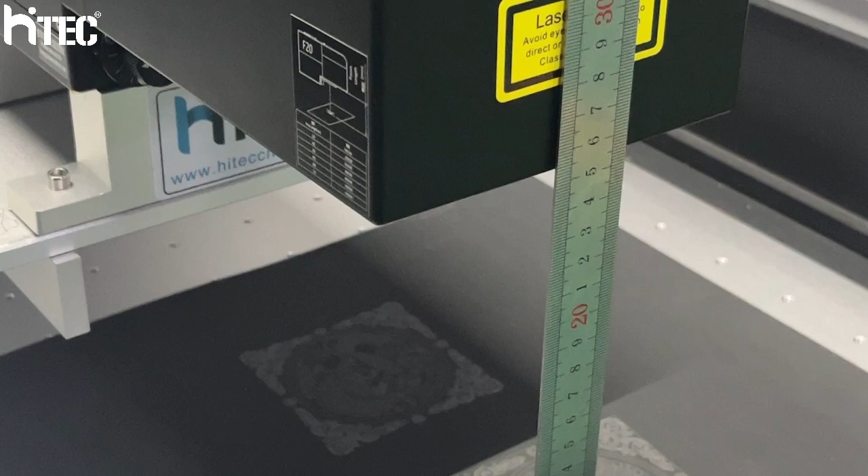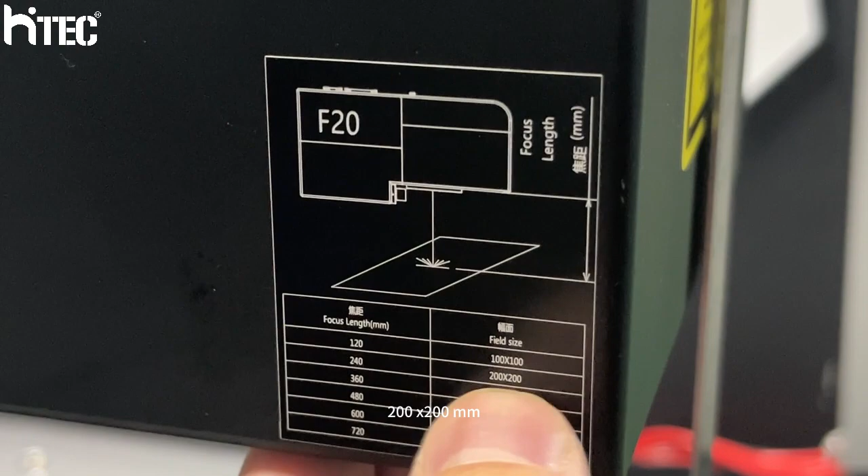When you change field size from 100 and 100 millimeter to 200 and 200 millimeter, see here. This is field size 100 and 100 millimeter, the focus length is 120 millimeter. For 200 and 200 millimeter, the focus length is 240 millimeter.

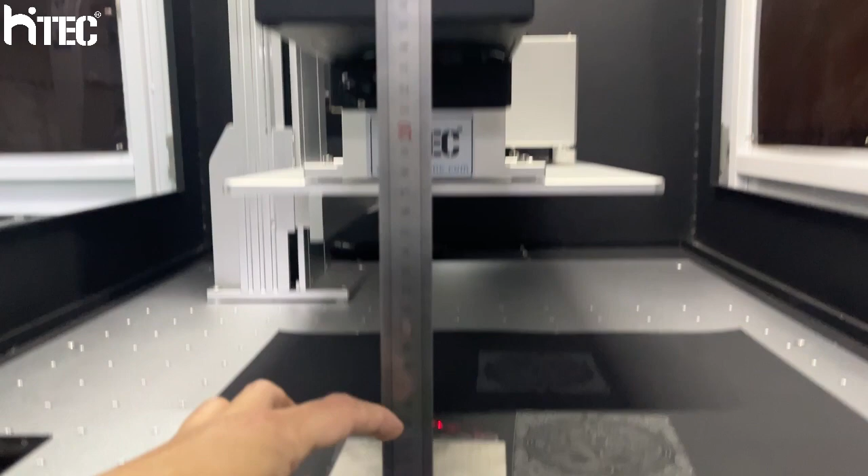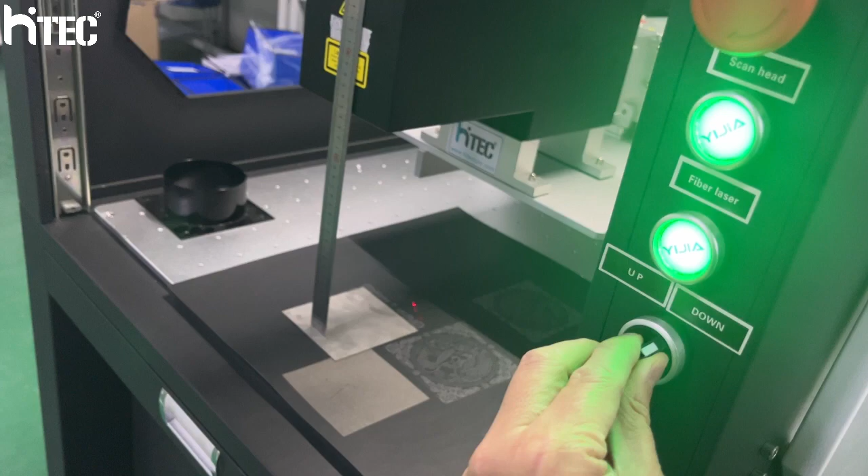So first we need to adjust this size from here to the material surface. You need to make sure it's 240 millimeter, so we need to move down. Check here, make sure it's 240 millimeter.

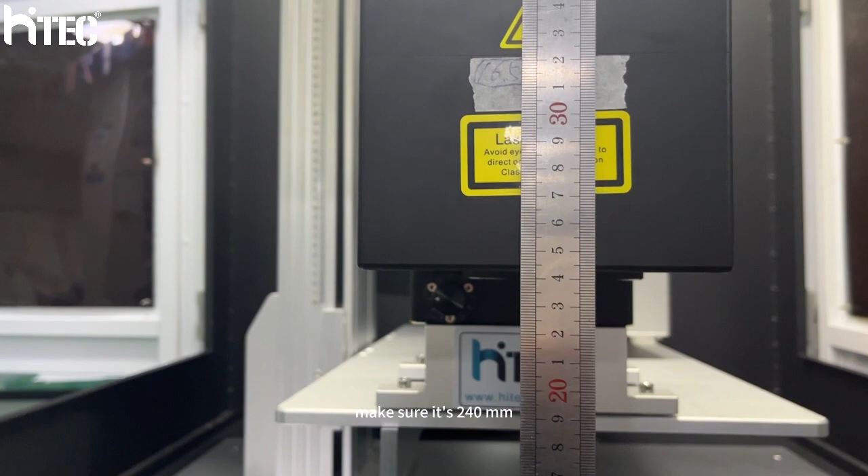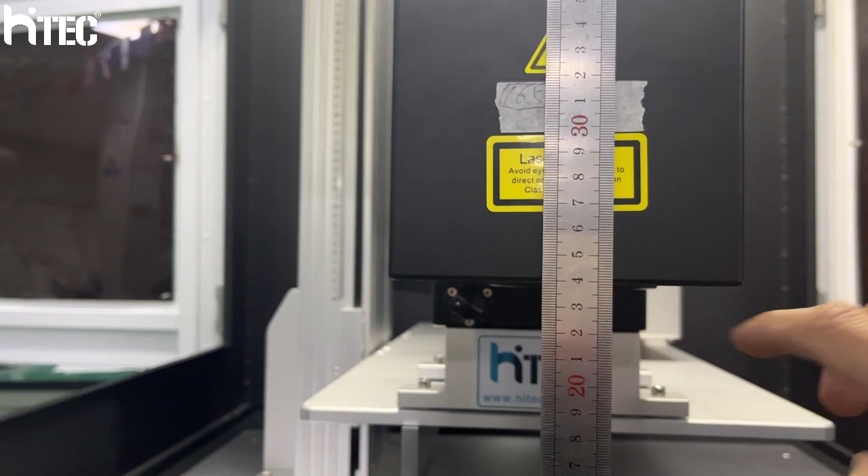Okay, here need to be very precise. And then change from software, make a design.

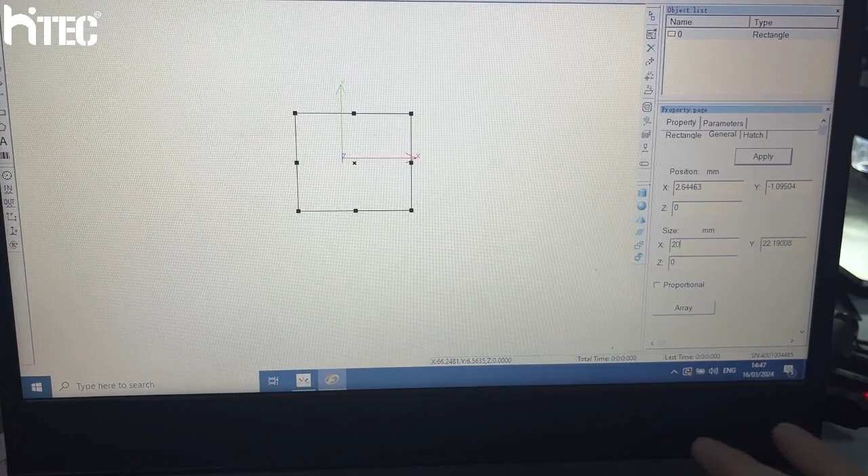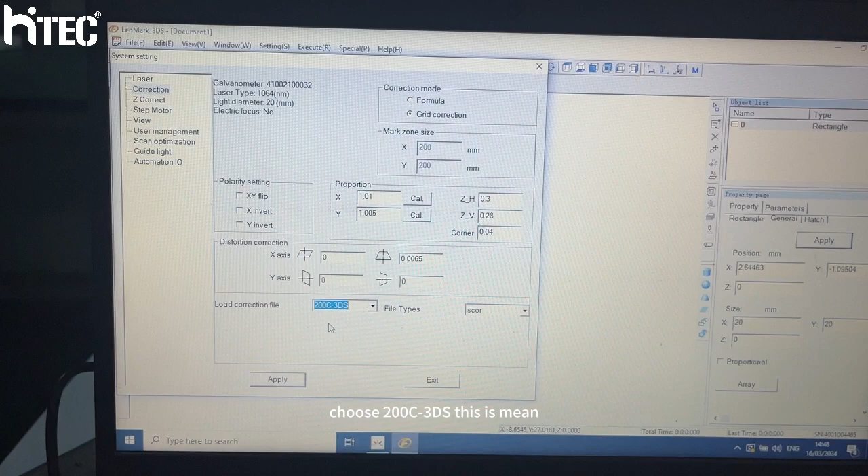Apply. Here, setting, system setting, correction. Here choose 200 - this means field size is 200 and 200 millimeter. Apply. Okay.

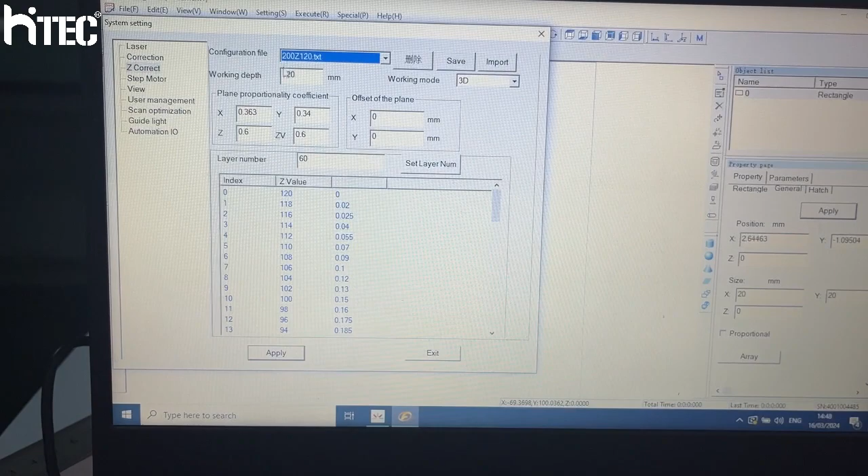And see here, choose this one, you can see working depth is 120 millimeter.

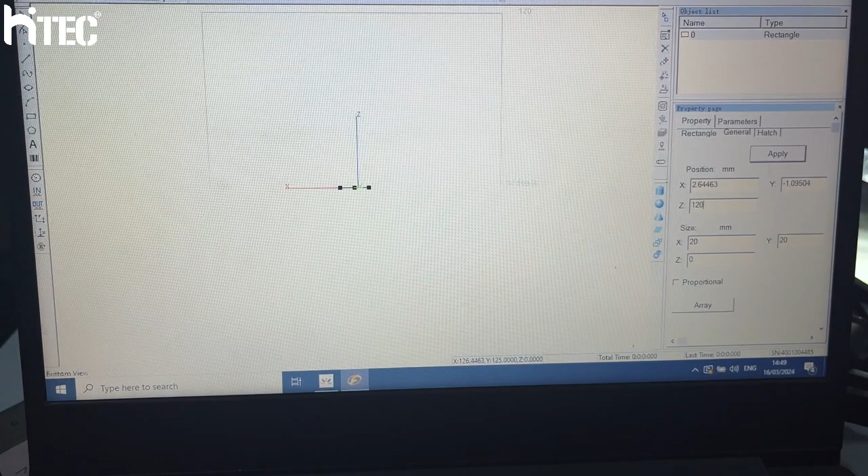So here need to set 120 millimeter. You can see this will move up to here. That's okay, here.

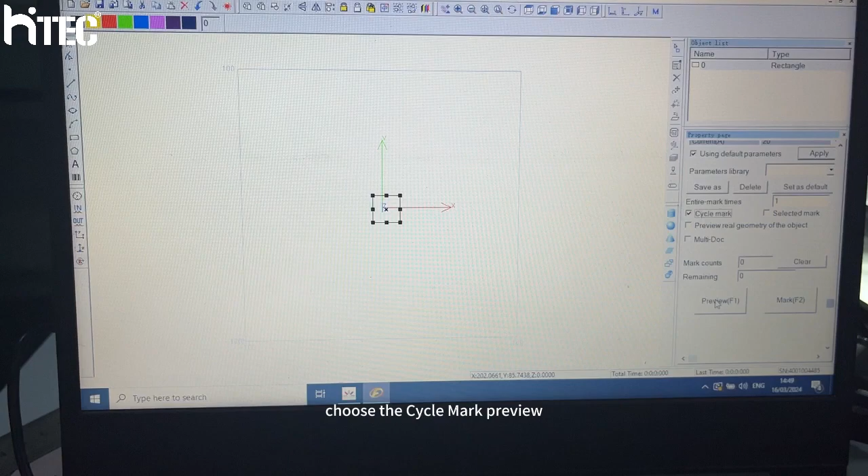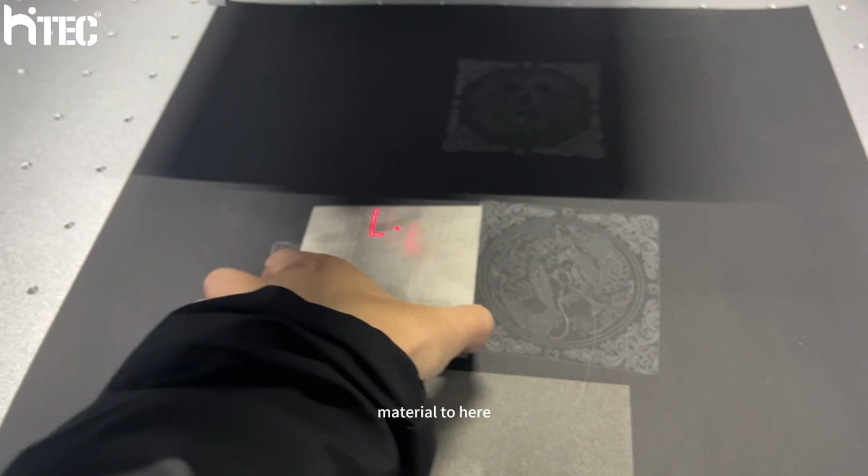Now choose the Cycle Mark preview. Move material to here, and Cycle Mark, and mark.

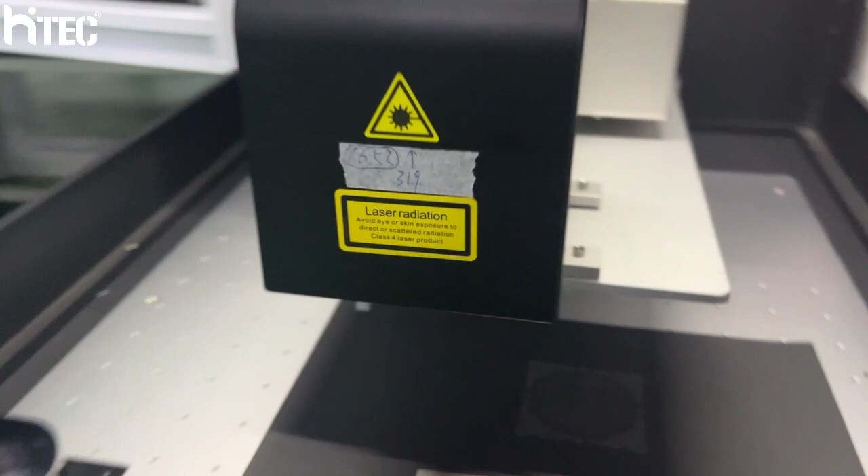We need to rotate this until the light is strongest. We can use this, you can see, go on, rotate.

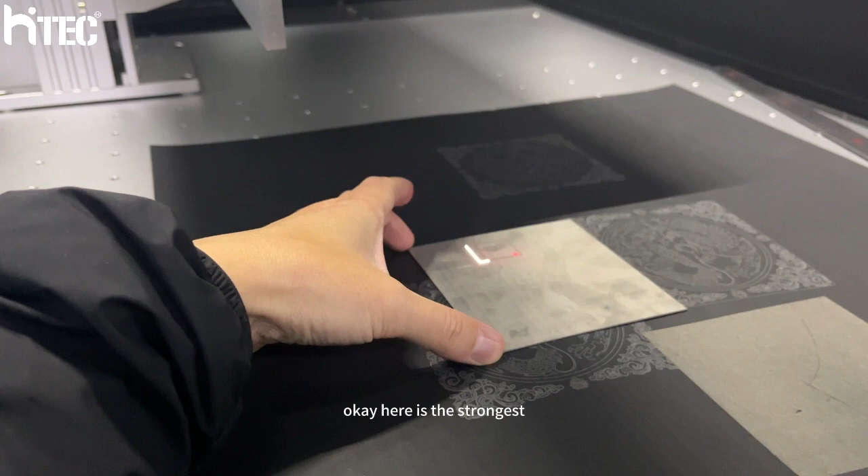Okay, here is the light strongest, that's okay. If you don't change working field size, here no need to rotate again.